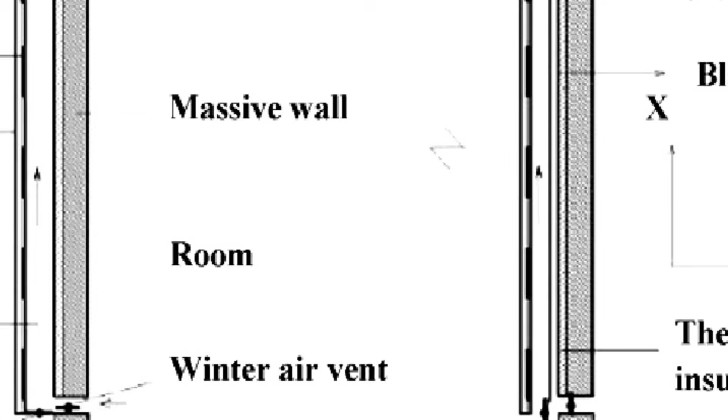That was 1975. The design that made it possible has no moving parts, no furnace, no fuel line, no electricity, and no service contract. It heats itself using a wall, and it will still be doing that in 100 years.

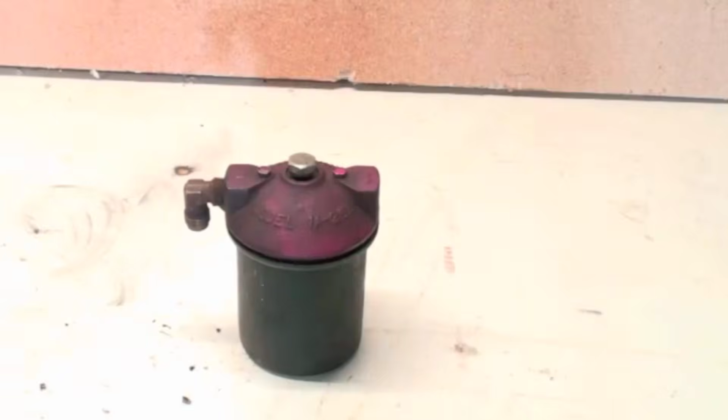You're going to pay $634 this winter just to keep your house warm. If you are in the Northeast, it is $763. If you heat with propane, it is $1,231. If you heat with oil, it is $1,518. Every winter, month after month, you pay that number, and nobody has ever told you that a Princeton architect

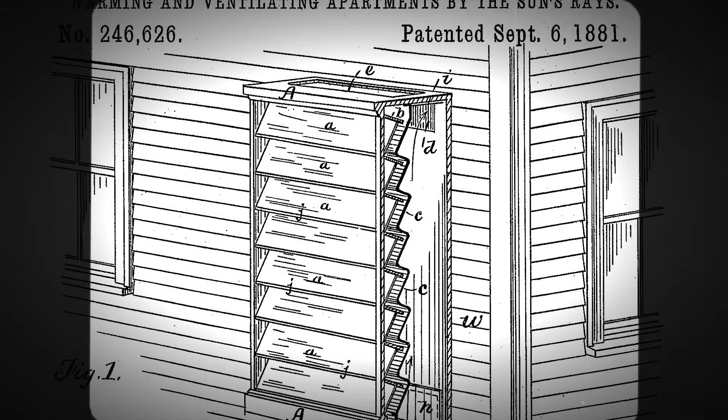proved it did not have to be that way in 1975, and that the technology he used was patented in 1881. The design exists. The data exists. Multiple government labs spent hundreds of millions of dollars confirming it works.

And in most of this country, your HOA can ban it by default, your building code will not recognize it, and no builder will offer it to you. That is not an accident.

In this video, we are going to expose 3 specific things that removed this heating system from American homes: the budget cut that ended the research, the building code that rejects it on paper even though it works in practice, and the HOA clause that bans the design by appearance.

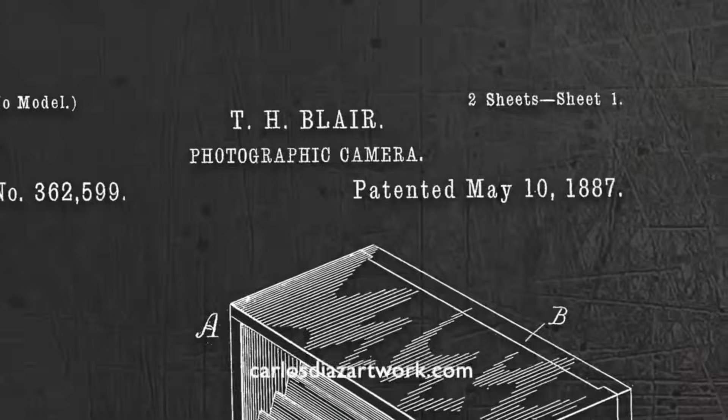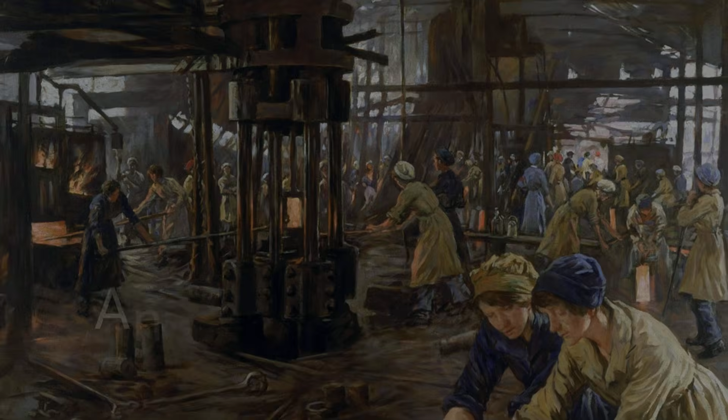It starts with a patent filed in 1881 by an American inventor named Edward Morse, who solved your heating bill 143 years ago. But the story does not begin with Edward Morse. It begins 2,400 years earlier, in ancient Greece, during a firewood crisis.

The Greek cities had burned through their forests. The old way of heating homes was not working anymore, so they did something that no one in a modern home improvement store has ever suggested to you.

They redesigned their entire cities around the sun. Socrates held classes on passive solar home design. This is documented. He described it in his own way: 'Now, in houses with a southern orientation, the sun's rays penetrate into the porticos, but in summer, the path of the sun is right over our heads and above the roof, so we have shade.'

He was describing an overhanging roof sized precisely to admit the low winter sun and block the high summer sun. He understood the geometry of seasonal solar gain in 400 BC.

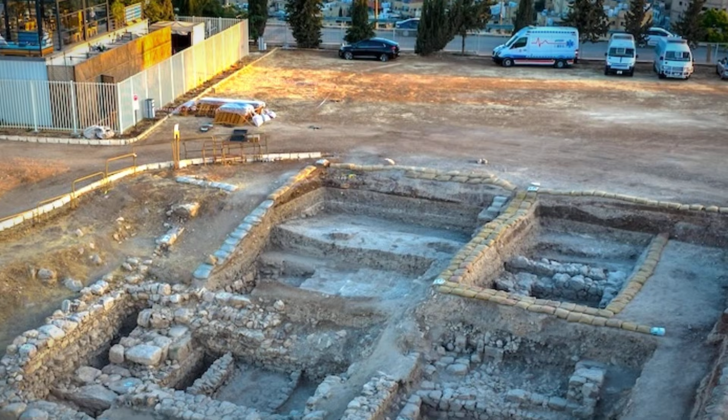They did not just advise this, they built it. The city of Olynthus, built in 432 BC in northern Greece, was designed entirely around this principle. Every street ran east to west, so every house could face south. Then Priene. Then cities as far as Bulgaria.

The ancient Greeks considered south-facing construction a mark of civilization. The playwright Aeschylus called people who did not build this way primitives, dwelling in sunless cavities.

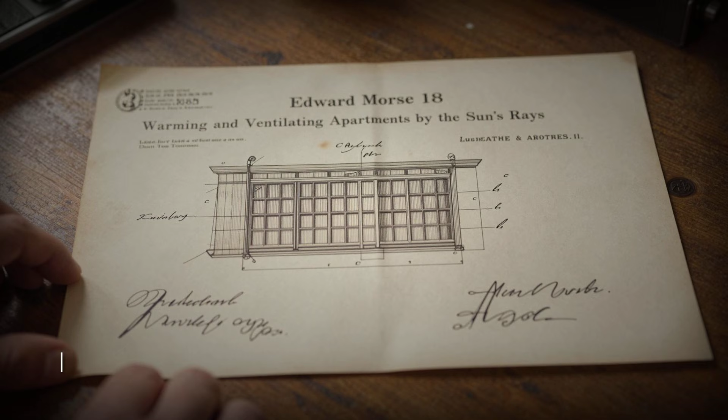This knowledge survived for centuries, crossed the Atlantic, and landed in an American patent office in 1881. Edward Morse filed patent number 246,626, titled Warming and Ventilating Apartments by the Sun's Rays.

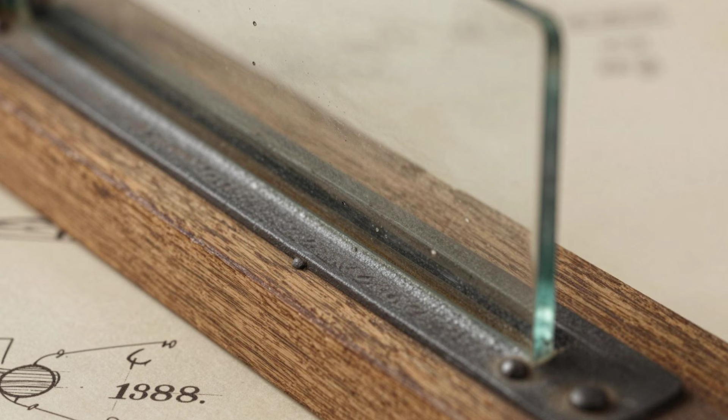A south-facing, dark-surfaced wall, a layer of glass in front, and an air gap between them. 2 vents to circulate warm air into the living space. The wall stores heat during the day and radiates it into the house at night.

The patent was filed. It disappeared entirely for 80 years. It was rediscovered in France in the 1960s by an engineer named Felix Trombe, who built the first modern version of this system in 1967 without any knowledge that an American had patented the exact same design nearly a century earlier. So why, in 2026, are we paying $600 to heat our homes every winter with a solution patented in 1881?

Think of your home the way it actually behaves on a sunny winter day. Sunlight comes through your south-facing windows. It warms the air. The house is getting free heat right now, and that heat is doing almost nothing because

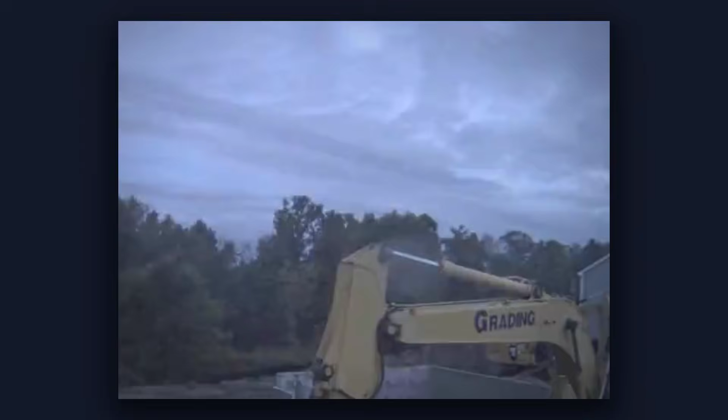most homes are built to be fast to frame and cheap to construct. They are not built to hold energy. This is what the Morse patent addresses. On the south side of your home, you build a wall out of something heavy.

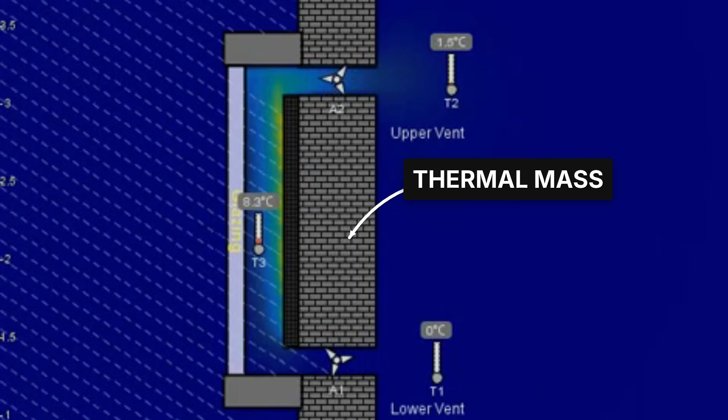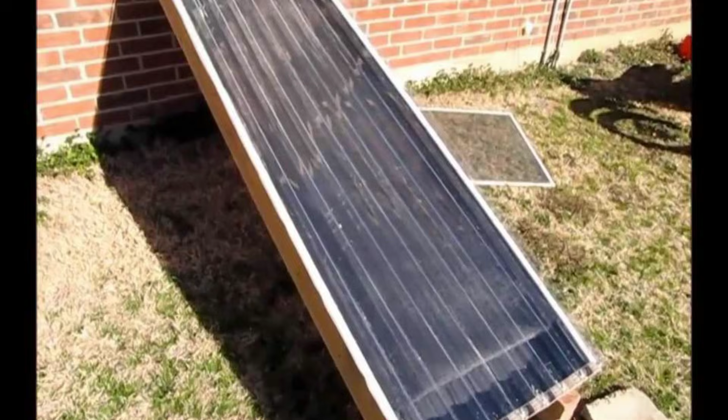Concrete, stone, brick, adobe. You paint it black. You put glass in front of it, with a few inches of air gap between the glass and the wall. Sunlight passes through the glass and hits the dark surface.

The wall gets hot. That heat conducts slowly through the thick mass, taking 8 to 10 hours to reach the inside face. That means the heat you collected at noon arrives in your living room at 10 o'clock at night, while you are sleeping, without the furnace turning on.

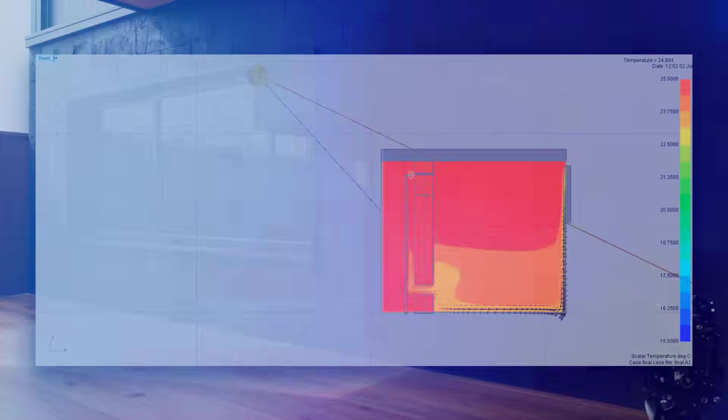This is a thermal battery. It charges during the day using free sunlight. It discharges overnight into your living space. No thermostat, no furnace, no motor, no filter to replace, no service call, no moving part of any kind.

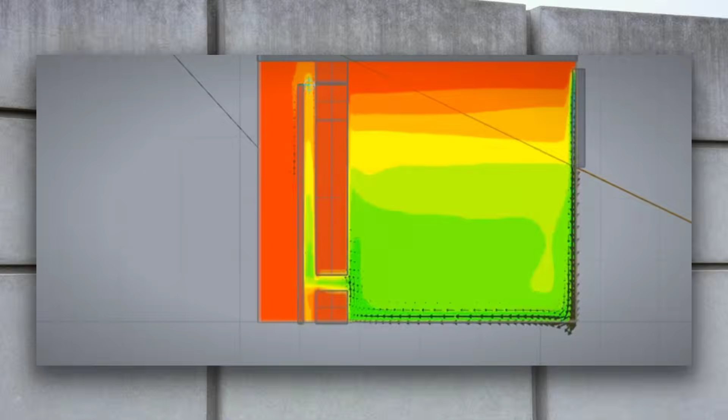Douglas Kelbaugh built one in Princeton, New Jersey, in 1974. His south wall was 600 square feet of 15-inch poured concrete, painted black, faced with double-pane glass. His first winter, he spent $108 in backup fuel for the entire season. The comparable house next door paid over $500.

The winter after that, his heating cost reduction was measured at 84%. The same design in Odeillo, France, documented 70% of yearly heating needs met by solar alone. Annual heating cost was approximately $225 compared to $750 for a conventional home.

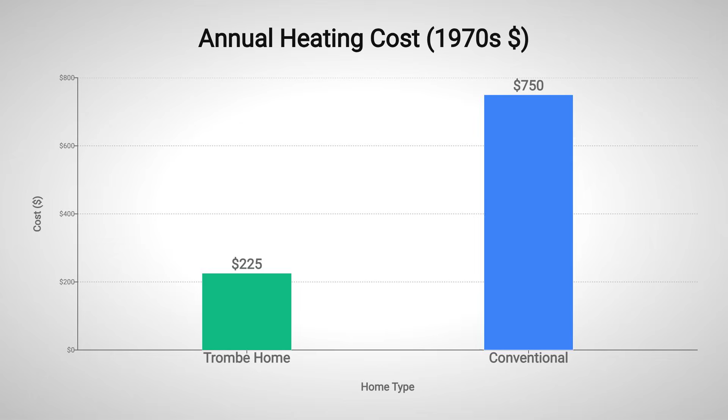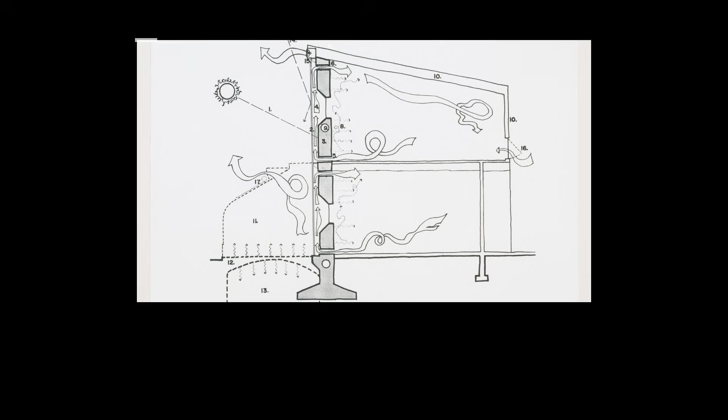In cold climates with good sun, documented performance showed 70 to 90% of yearly heating energy from the sun alone. No moving parts. The lifespan of the wall is over a century. More than 200,000 residential passive solar buildings were documented in the United States.

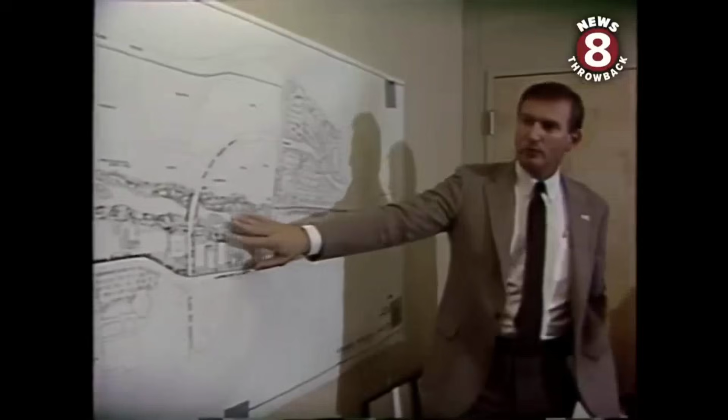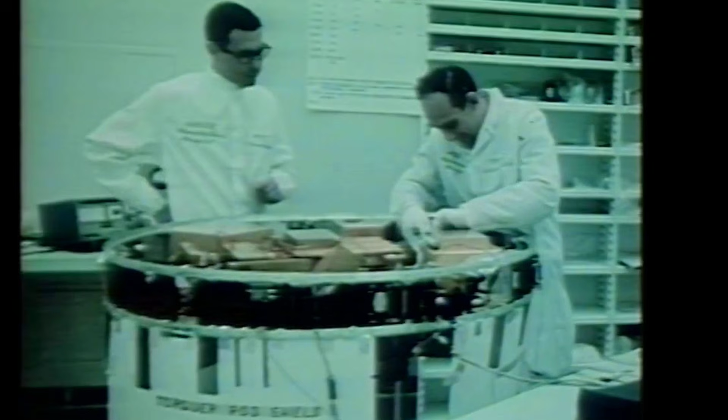But the performance data is only half the story. The real question is why this technology, publicly funded, publicly proven, documented in over 200,000 American homes, virtually disappeared from home building by 1985. Between 1978 and 1981, the number of passive solar homes built in the United States grew 80-fold, not 80%, 80 times.

The Solar Energy Research Institute had a budget of $130 million, larger than the combined renewable energy research budget of every other country on Earth. Nearly 1,000 people worked there.

The institute ran a public home building program in Denver, a parade of homes where over 100,000 people toured passive solar model houses in a single weekend. 31 families bought them immediately. 60 more put down deposits.

Then President Reagan took office. In 1981, the Solar Energy Research Institute budget was slashed from $130 million to less than $30 million. Staff was reduced from nearly 1,000 to 450 people. The institute's director, Denis Hayes, the founder of Earth Day, resigned.

The home builder programs that were teaching architects and contractors how to build without a furnace were shut down. In 1985, the 30% federal investment tax credit for residential solar installations was allowed to expire. No replacement, no transition, just gone.

In 1986, President Reagan had the solar panels removed from the White House roof. The removal made front pages, and it was understood as a statement. Cheap oil was back. The urgency that had driven the research evaporated, and the institutional infrastructure that had been training the building industry, the design tools, the builder programs, the tax incentives, the public-facing demonstrations, was dismantled in 4 years.

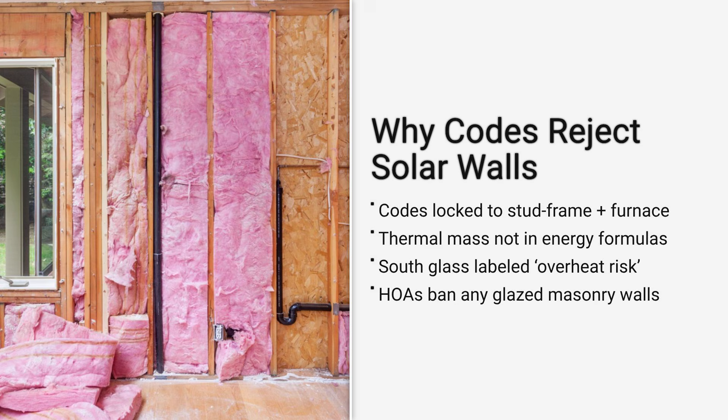But what made the disappearance permanent was the building codes. The model building codes adopted across most American jurisdictions in the 1980s and the 1990s were written for a standard construction template: stud frame walls, fiberglass batt insulation, and a conventional furnace. Those codes require minimum insulation R values.

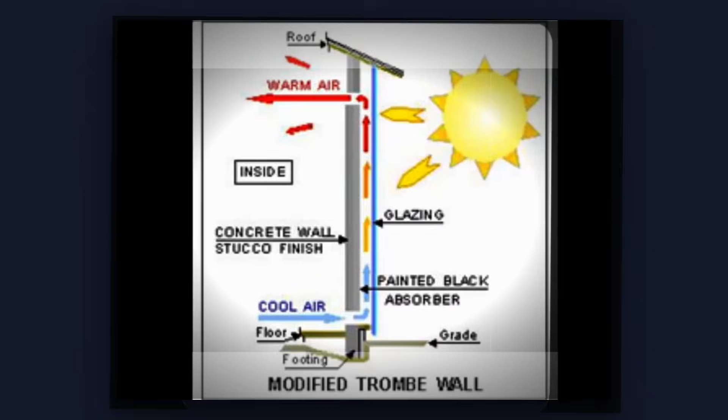A trombe wall fails that test, not because it does not work, it demonstrably does, but because thermal mass works differently than fiberglass batts. It stores and releases heat. It does not have a static R value. The code does not have a category for it. So on paper, the design that cut heating bills by 84% in Princeton fails a building permit review in most American counties.

And then there is the HOA layer. 40 million American households live in HOA communities. HOA organizations control exterior appearance. They can ban south-facing glass walls, dark exterior surfaces, unconventional roof lines, and earth-bermed construction, every architectural feature that makes passive solar work.

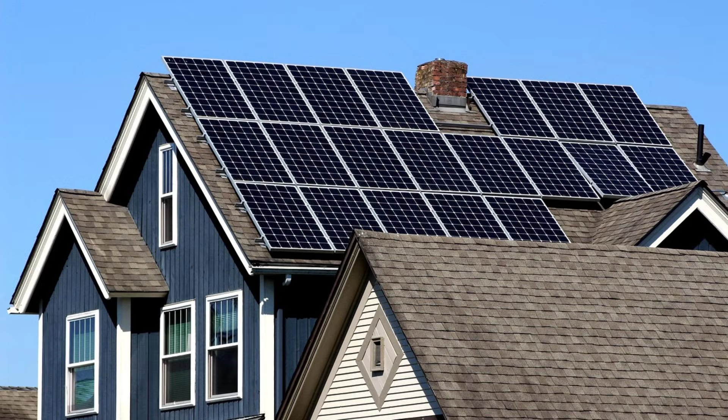In 21 states, there is no solar access law limiting this authority at all. In most of the remaining states, the laws that exist were written for photovoltaic panels, not for passive solar architecture. Your HOA can ban a trombe wall today in most of this country, and there is no statute that protects you.

There is no supply chain behind a thermal mass wall. No company sells you the maintenance contract. No utility bills you monthly for the heat it produces. No manufacturer profits when you understand how it works. That is not a coincidence. That is why you have never been offered this design by a builder, a bank, or a home improvement magazine.

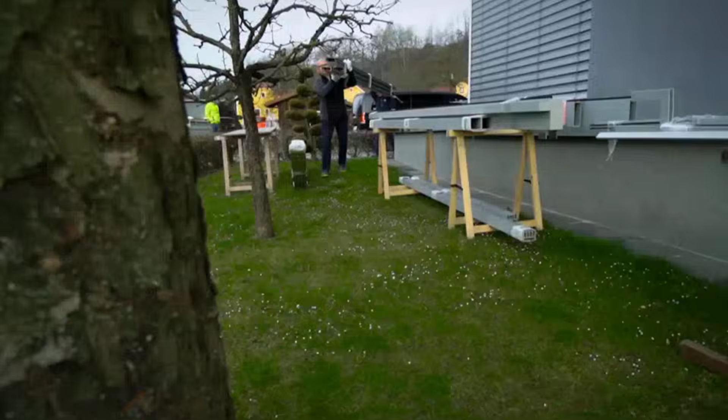So here's what you can actually do with this. If you're building a new home or doing a major renovation, this is one of the high return decisions in the entire project. A properly designed, passive solar home with south-facing orientation, thermal mass floor and wall, high-performance south glazing, and a roof overhang sized for your latitude reduces heating needs by 50 to 80%.

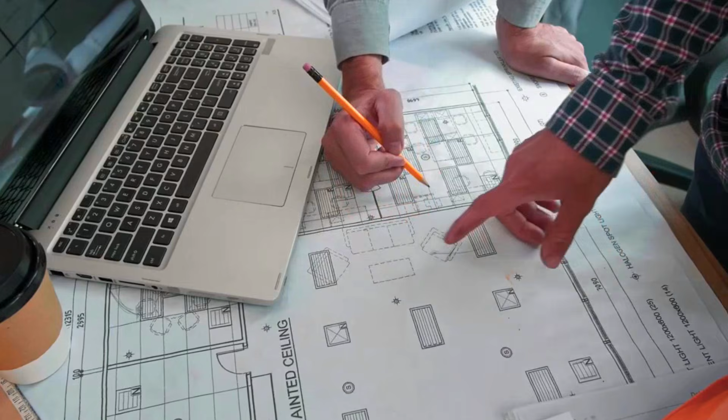NREL publishes free passive solar design guides. The Passive House Institute US maintains a directory of architects trained in this work. The American Solar Energy Society, which has existed since 1954, has professional contacts and resources. The information is public. The physics is not proprietary.

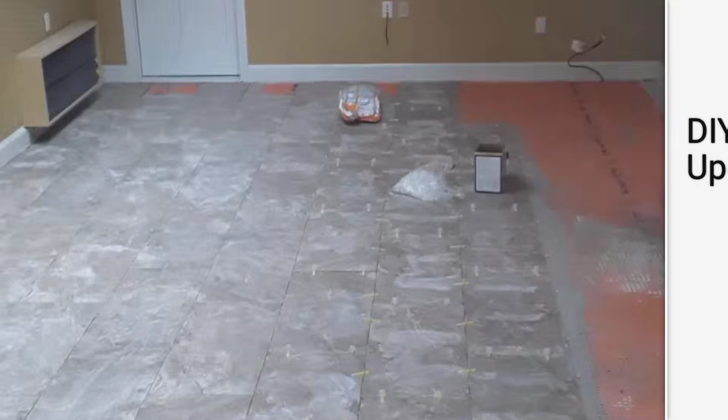If you are in an existing home or renting, the entry point is the floor. Thermal mass is the principle. Concrete, tile, and brick on a south-facing floor store solar heat during the day and release it overnight. If your living room gets direct winter sun and you have carpet or hardwood on that floor, you are currently wasting that heat. Dark tile on a south-facing floor costs the price of the tile.

No permit, no contractor, no HOA approval. This will not give you 84% savings, but it will reduce the hours your furnace runs, measurably, every sunny winter day. For the more committed version, the Morse patent from 1881 is in the public domain.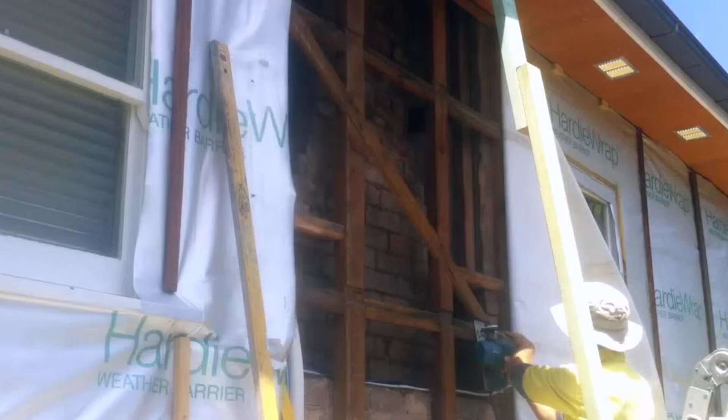The Kelbaugh wall design is not proprietary. A south-facing dark masonry surface, a layer of glass in front of it, and two vents, one at the bottom and one at the top, is something you can add to an existing south wall as a retrofit.

Passive solar builders have documented the process. Forums exist. Case studies exist. The knowledge did not disappear. It just stopped being taught once the funding was cut.

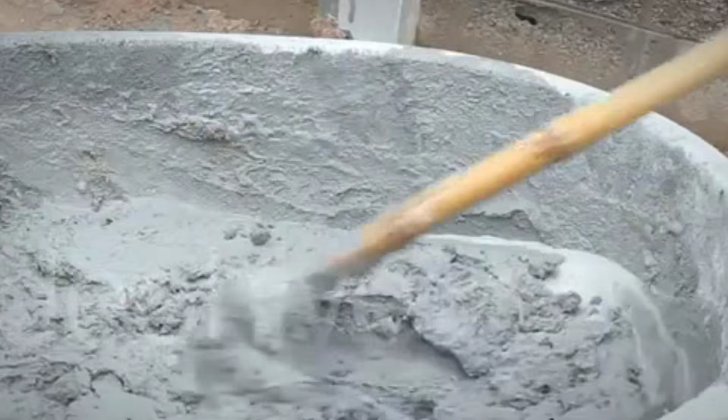The design is 143 years old, built from materials that cost almost nothing, proven in a New Jersey winter, and documented by a government lab that employed 1,000 people before someone decided the research was not worth funding.

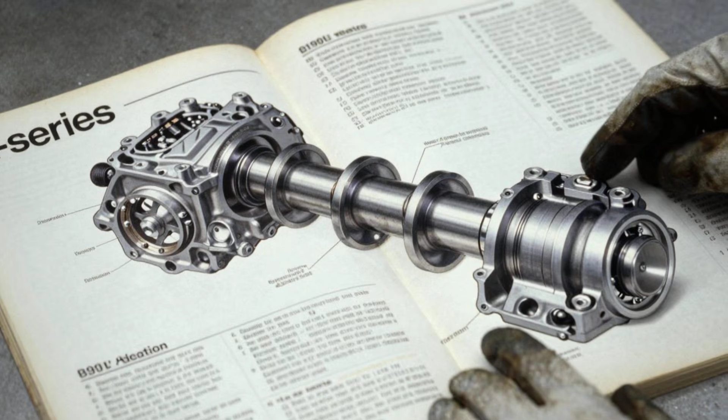So here is where things stand. You will pay $634 this winter to heat your home, possibly more. A house in Princeton proved in 1975 that a south-facing concrete wall could cut that bill by 84%.

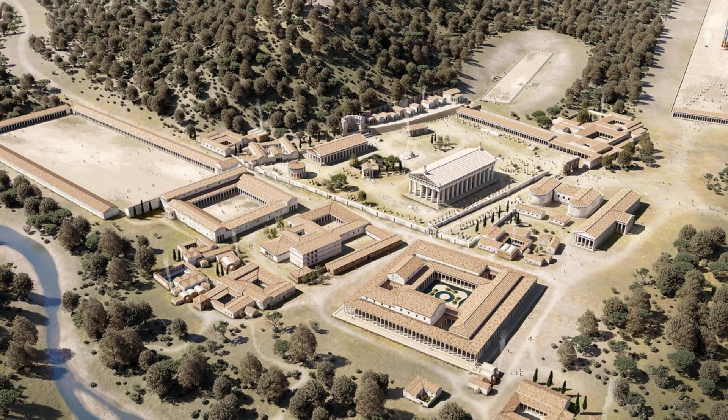The principle behind that wall was patented in 1881. Ancient Greek cities were built around this idea 2,400 years ago, and the government lab that was bringing this technology into mainstream American home building had its budget cut by 77% in 1981 and never recovered.

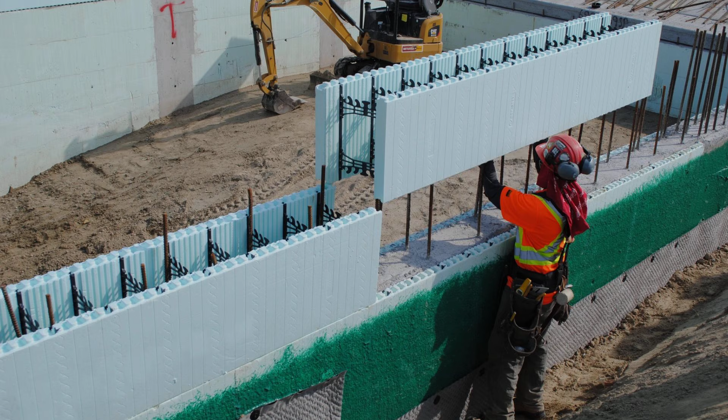No one banned this design. No law says you cannot have a thermal mass wall. The system just was not rebuilt for it.

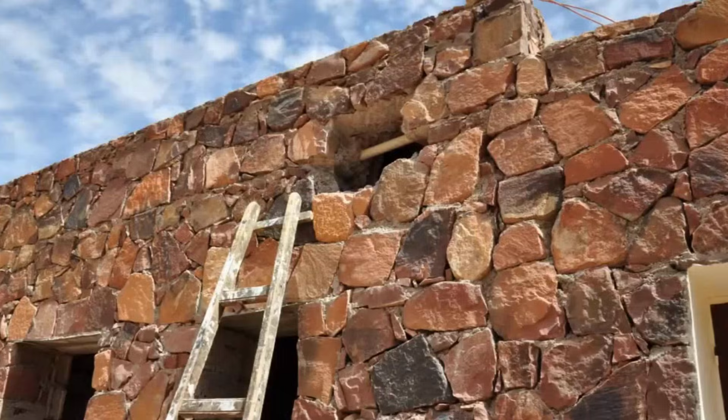Reject the idea that you need a new piece of technology to solve an ancient problem. The people who understand thermal mass are already building with it. They are paying $108 for a winter.

They are not waiting for a utility company to offer them a better plan. There is no company that profits when you understand how a trombe wall works. That is not an accident. That is exactly why you have never seen it on the front page of a home improvement magazine.